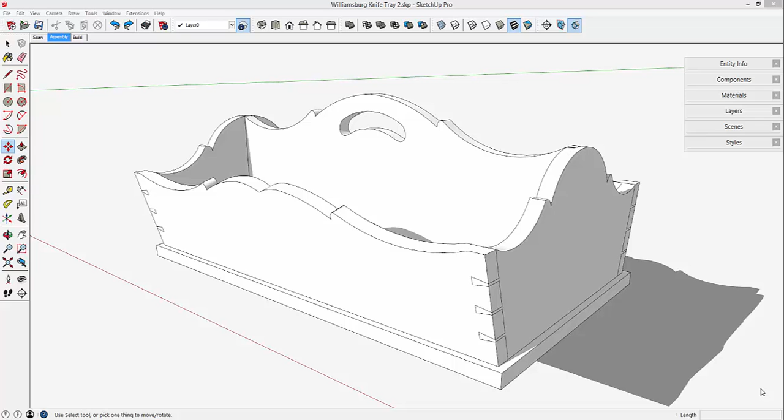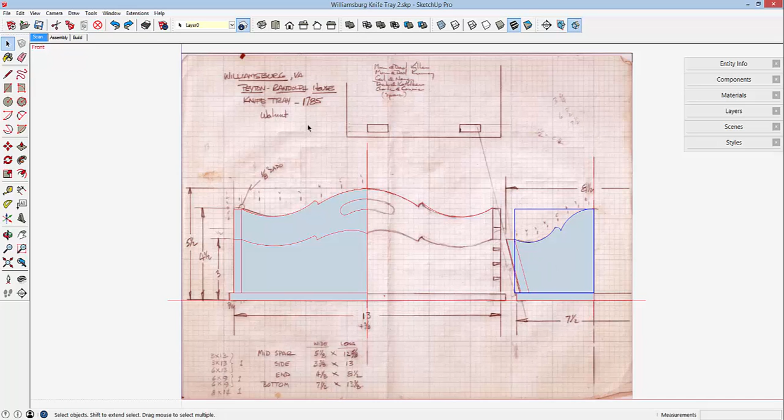This is the second of a series reconstructing this Williamsburg knife tray, 18th century style, with dovetails in the corners and splayed sides. Last time we created parts of the box by tracing over this hand drawing, creating small flat faces that are groups, then turning them into SketchUp three-dimensional parts, as shown with the side and end component.

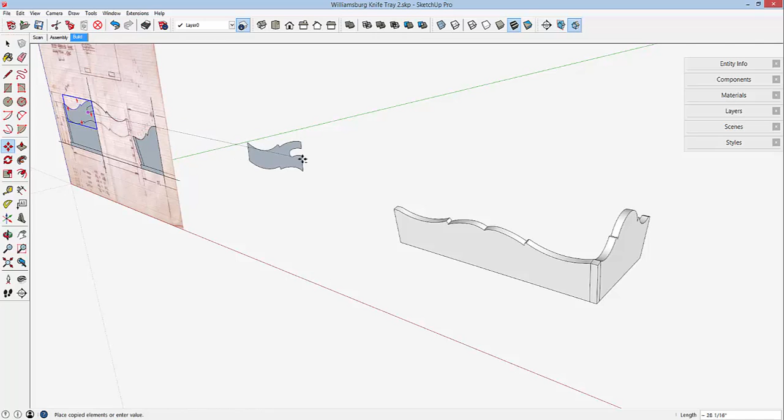In this video we'll add the center handle section, or I call it the Mid-Spar. I'll copy over this group that was traced over in the sketch.

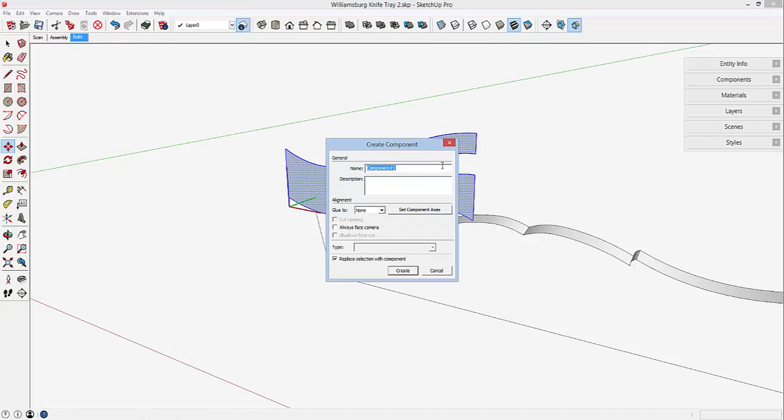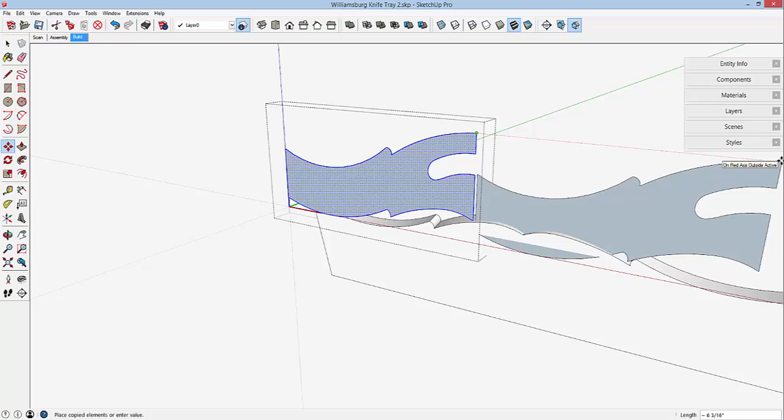I'll make this a component at this stage, and since it's a symmetrical component, I can copy this shape, bring it over on the red axis, flip along the red axis, and reattach at the center point.

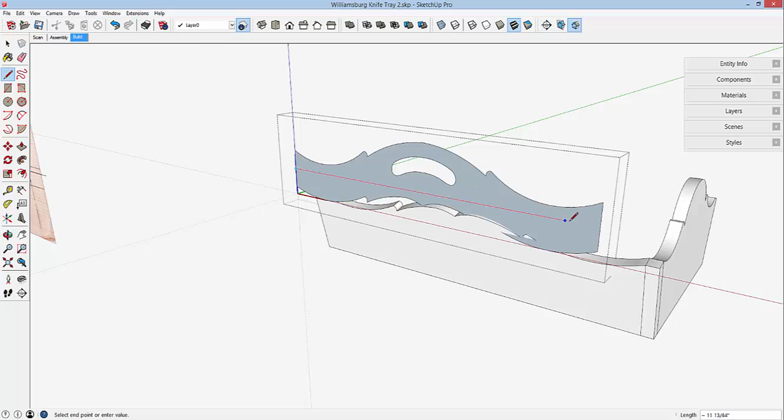We don't need the center lines, so I'll erase those off the face. Also, the shape of the bottom edge of this face is not correct - it's a flat face, so I'll just draw a line and delete the shaping that occurred because of the trace over.

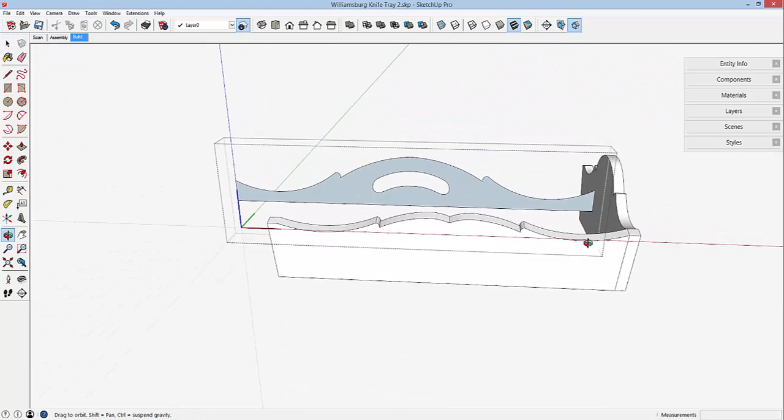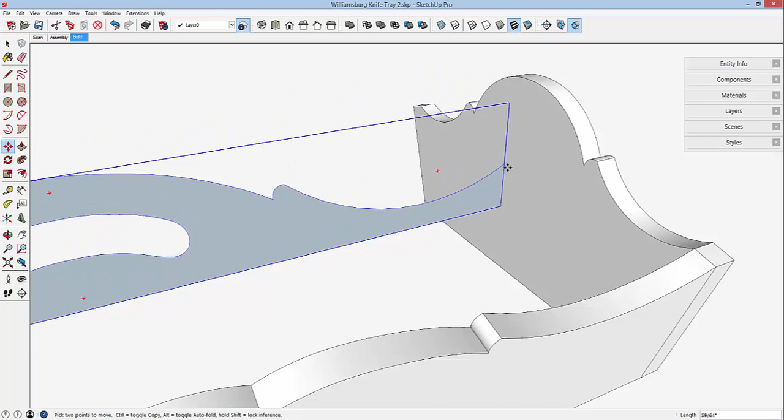Later on we'll make that a complete full width component. But now I want to try to connect this thing in its place within the box structure, located right at the center line. The best way to position this at the center line is to find the midpoint of the end.

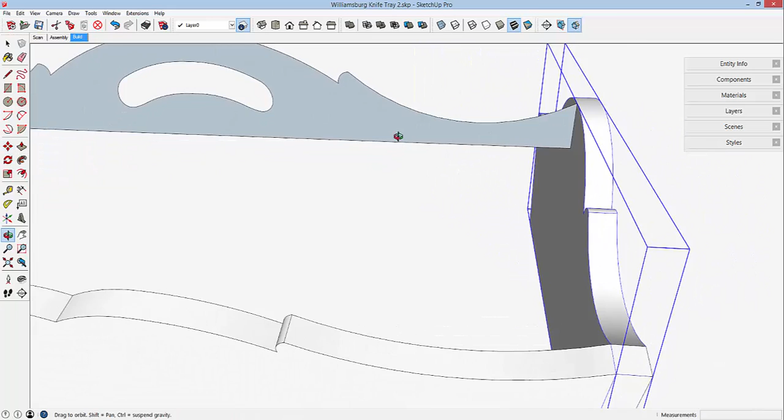I'll just push along - there it is, the midpoint in the component, on the end component. Now I know I have this piece at the midpoint, and I can come up and put the top bit right at the top of the end piece.

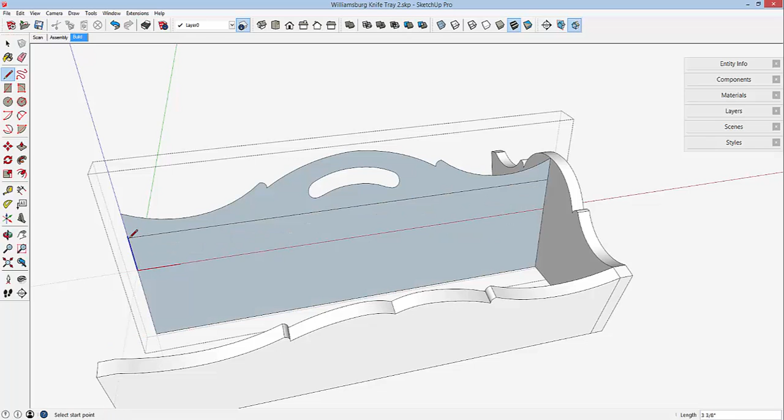We can now create the missing parts of this face, and it's the same height as the end, so I'll just work from that - I don't have to measure anything. But we need some thickness, and it's 3/8 of an inch thick, so I will go 3/16 in that direction and 3/16 back.

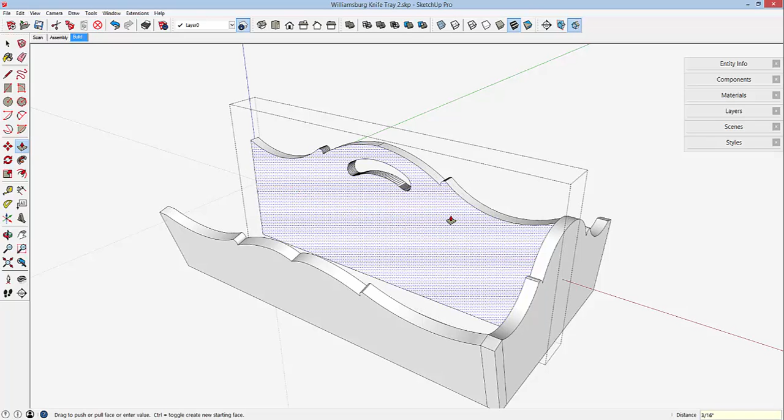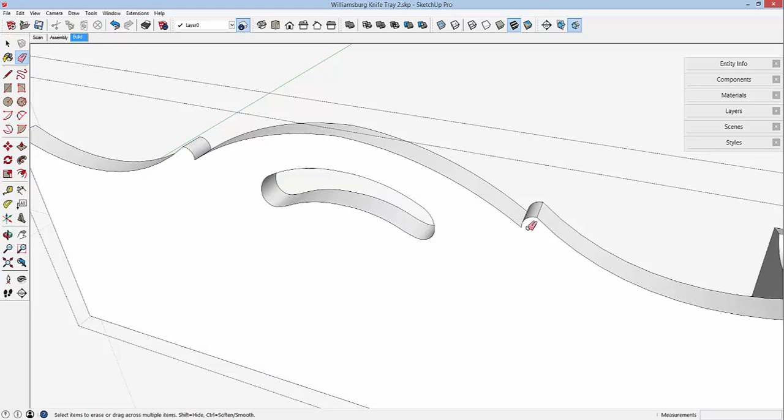Now this Mid-Spar fits within a dado in the end, but there I just smoothed out some miscellaneous edges that appear, and I see a couple more here that I'll clean up with the eraser tool and the control key. So the ends of this Mid-Spar ride in a dado in the end pieces.

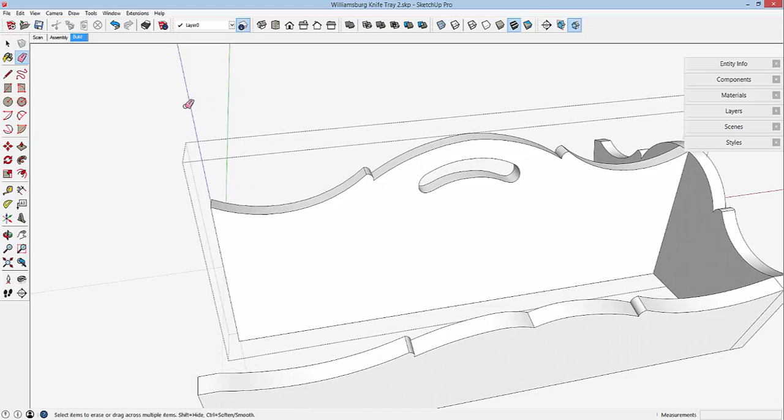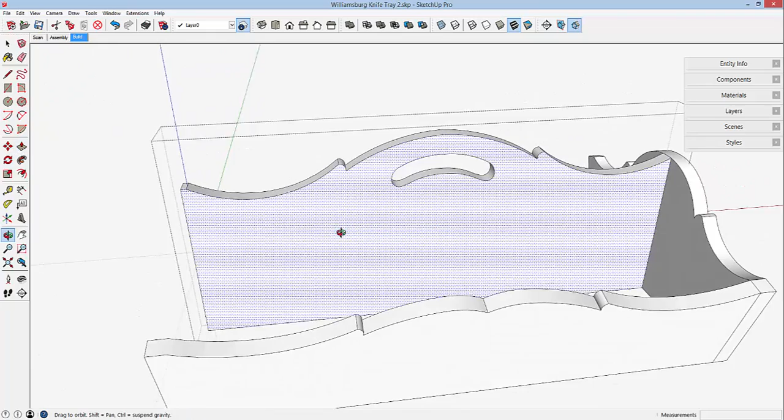That dado is 1/8 of an inch deep, so that means the Mid-Spar needs an extra 1/8 of an inch protrusion into the end, and there it is. I've used the push-pull tool and extended it 1/8 of an inch into that end piece.

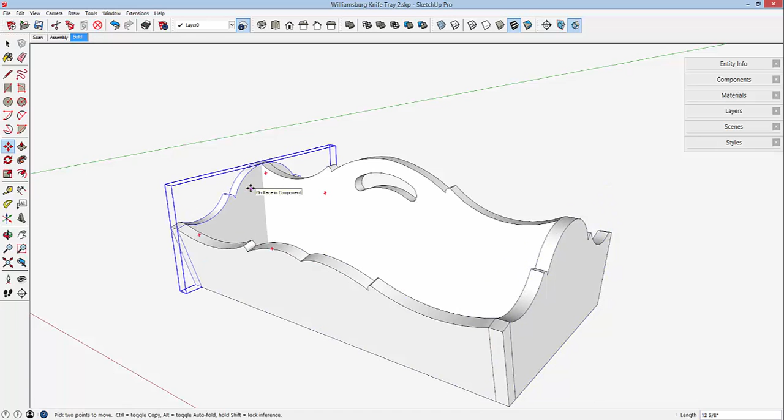Let's just move the end piece over there so that we can see how that looks. I copy this end piece and move it over to its position there, and have a look up here. We'll edit the end piece and make this dado.

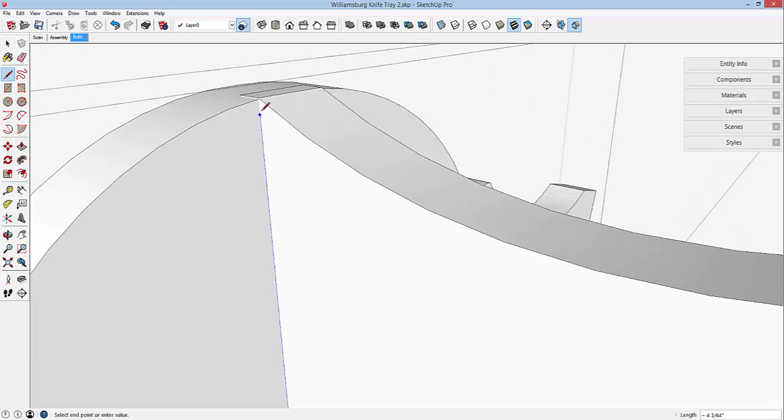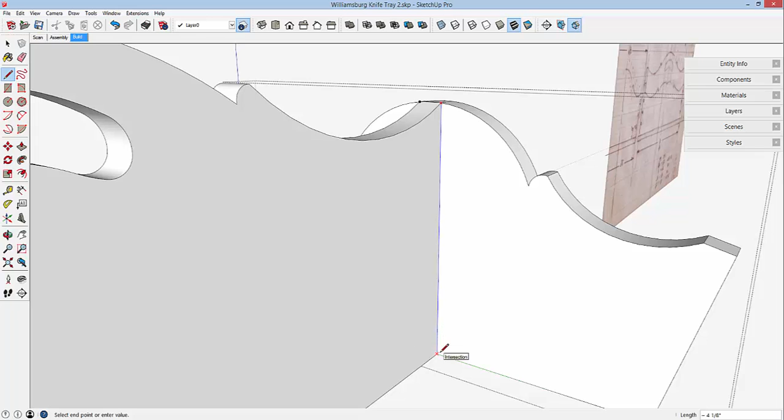I'll just draw a line on the face of the end where the Mid-Spar meets the face, and do that again on this side of the Mid-Spar, and that outlines the shape of the dado. Turn on X-ray, and with a push-pull tool push back the dado 1/8 of an inch deep. There it is.

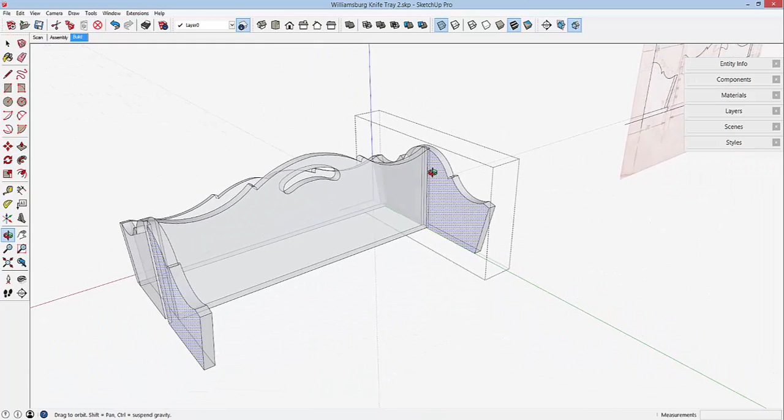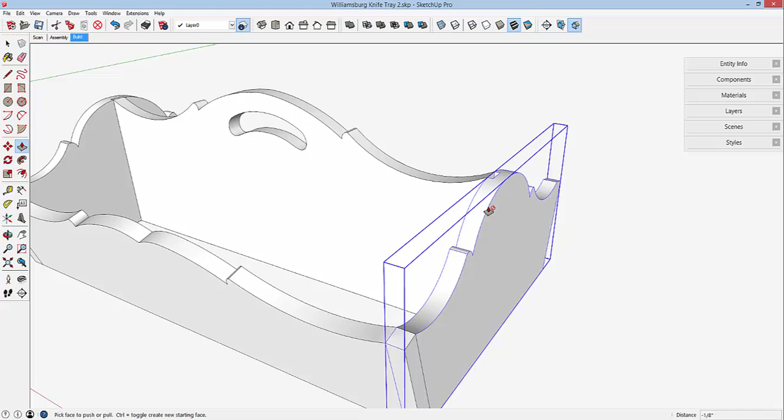Now I'm noticing that I forgot to do a flip along when I copied the end over, and you can see now that the dado on this end is opposite. So I'll flip this one on the red axis and extend this end of the Mid-Spar - edit the component, push-pull tool, and pull out 1/8 of an inch.

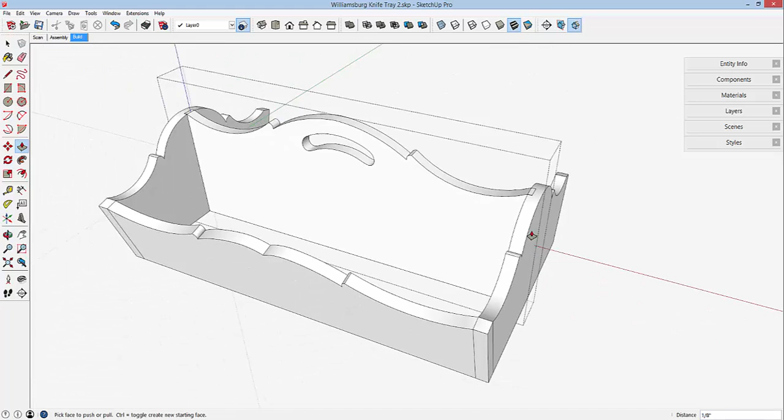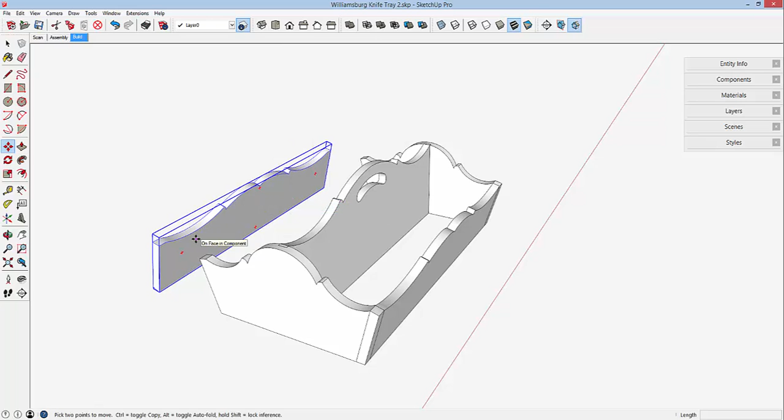We're missing the side on the far side. Might as well copy this side and move it over, flip it on the green axis. But I notice I had changed the axes on that piece, so the angle is not correct.

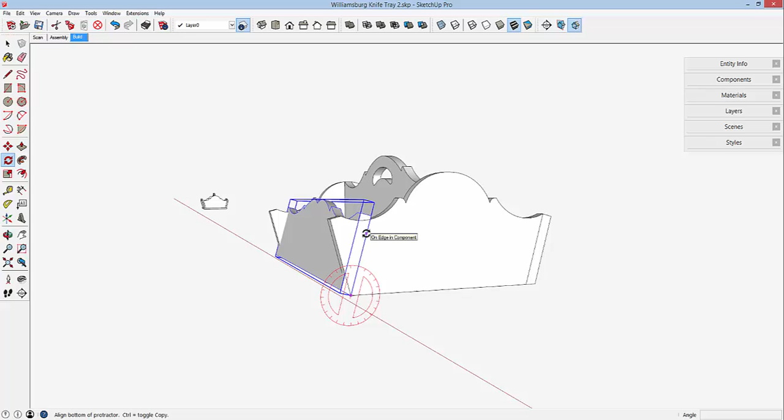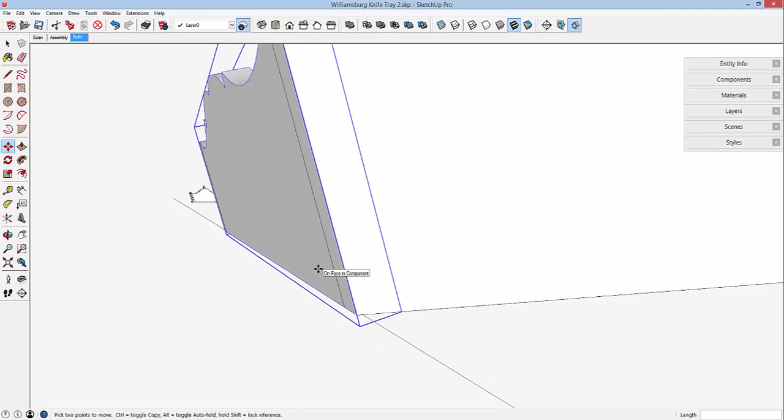I can fix that by a rotation, pulling it over into position at a corner, use the rotate tool, get the red - make sure I've got the red color - and pick the edge of the side and rotate it over until it connects with the point in the end. The dovetails overlap here in the corner, so I need to pull that in for the overlapping.

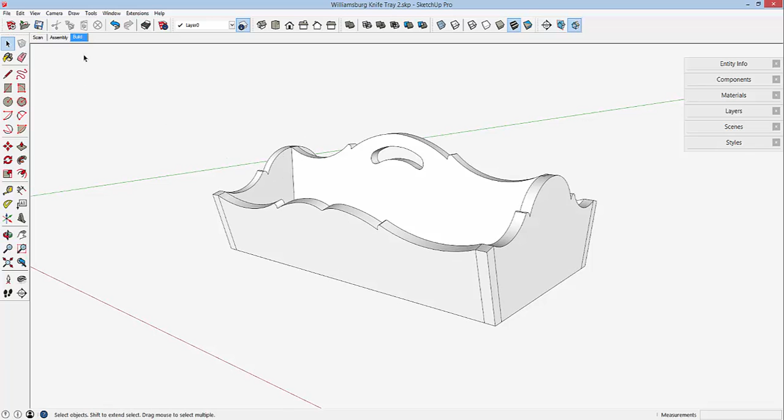The last part that needs to be added is the base of the knife tray. Again, we can go over to the scan view and pick the shape of the base, the rectangle. Here it is from the side view. I'll pull that group over and connect it to the center midpoint of the side.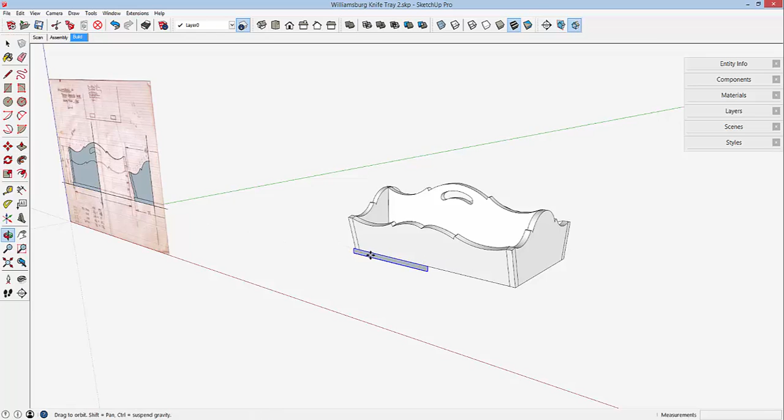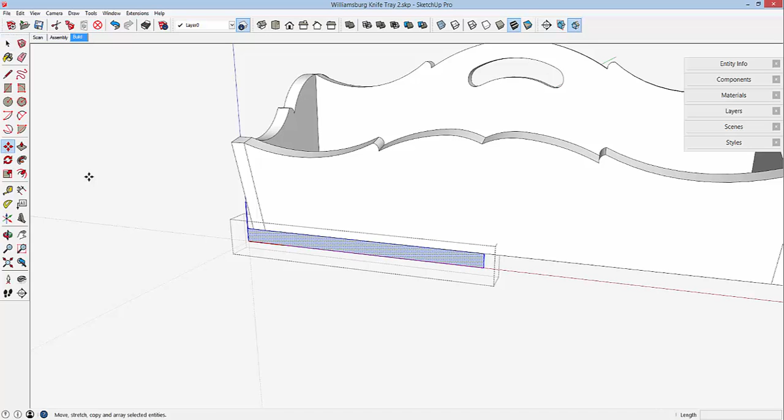Explode, make the component - I'll call this the base. This is half the base, so edit the component and then copy all of it over to the right. Flip along - I guess I don't really need to flip. This is just a rectangle.

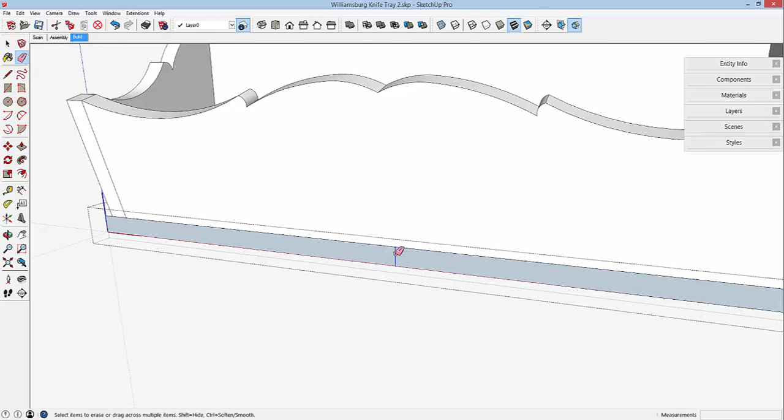Bring it back and delete the edge in the middle. Now all we need is a push-pull tool. I'll extend that over to the other corner. Needs to grab onto something to stop.

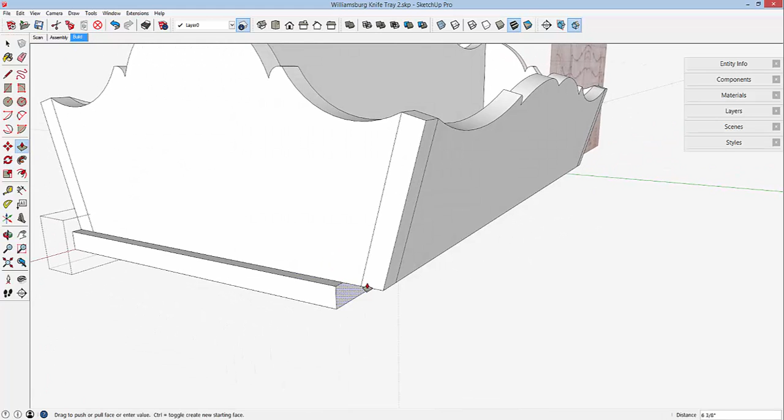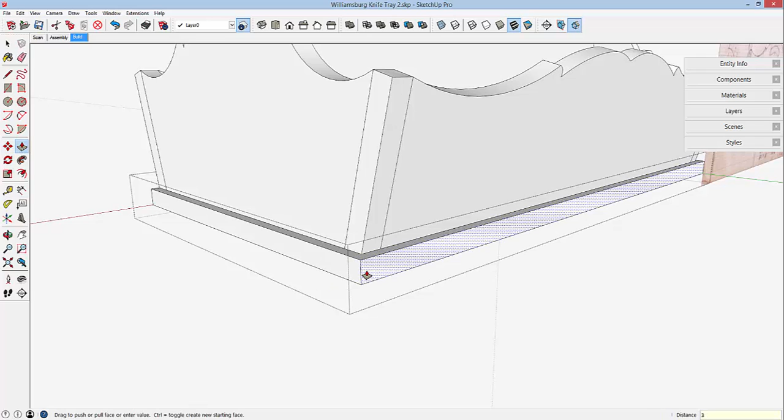There it is - the overhang, I think, is 3/16. Let me check that with the tape measure. Yes, 3/16. So again, with the push-pull tool, extend out the base 3/16 on this side and 3/16 on that side. Close the component, and everything's done except the corner joints, the hand-cut dovetails that I'll show in our next session.